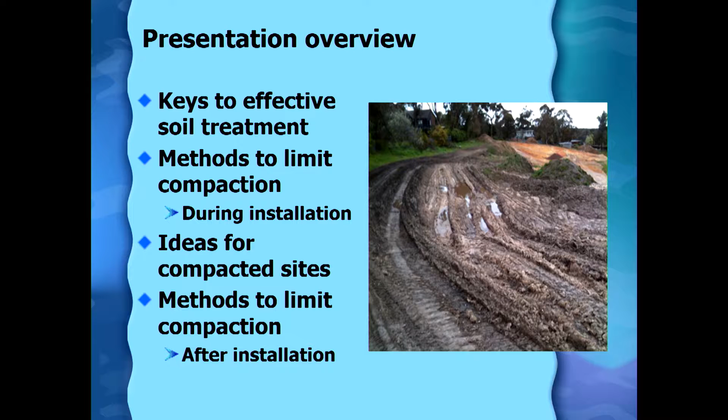We'll then talk about methods to limit compaction during the installation process, ideas for sites that are already compacted. What if the only place you have to go got compacted? Hopefully not by you, but what about the builder, the homeowner—maybe it used to be a feedlot, whatever the issue might be. And finally, education for the homeowner, because you may leave their soil dispersal system there working well, and then they compact it through what they view to be regular activities.

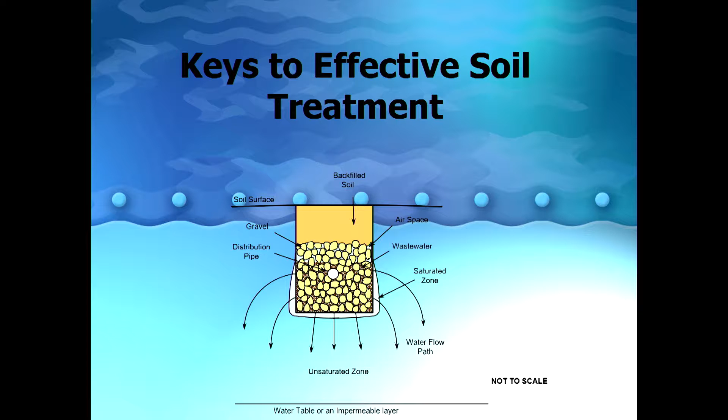So again, first looking at that key: we've all seen a diagram like this, and exactly what's in your trench doesn't matter because where all the magic happens of treatment and dispersal is the soil around it. So the key thing is when we say unsaturated soil, those pores are open, so we get air—the oxygen around us—to passively diffuse into the soil. So if that soil has been smeared or compacted, treatment is going to be challenging, and dispersal of that water moving away from the system is going to be challenging.

So I mentioned unsaturated soil—it also should be natural. And it's really hard to find sometimes on some sites, natural soil. But the key thing I'm going to focus on is what we do that makes the soil not natural. So it is true that, you know, if it was ever farmed, was it compacted?

We also know that if you look at any given field, the row ends where they turned around are much different than the rest of the field. So identifying areas where we have the least amount of compaction, and then looking at shallow dispersal.

This is another key to effective treatment, because the fact of the matter is, generally speaking, the best soil we have is near the surface for several reasons. One, it's where all the microbes are. They want food and oxygen, and generally, the closer you are to the surface, the more food and oxygen there is. It's where we have root activity, and this all gets back to oxygen transfer.

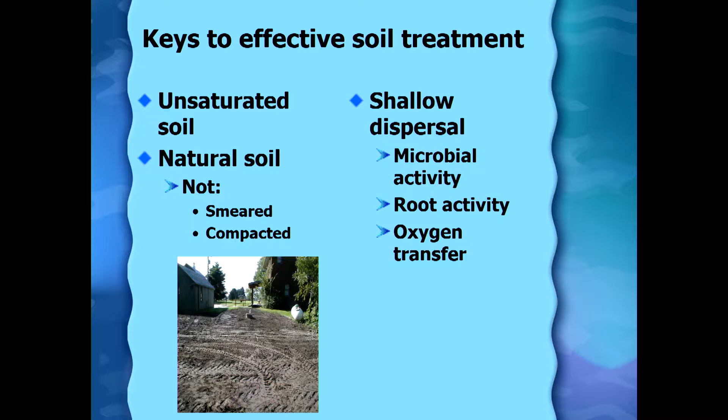The air that we're breathing around us is 21% oxygen. So we are relying upon natural diffusion for that oxygen to get to our dispersal system. So if it's 2, 3, 4 feet in the ground, there's going to be less oxygen reaching that infiltrative surface.

So when we look at the first issue of unsaturated soils, the pores in about half of the soil—you take any given soil, about half of the actual makeup of the soil is pores. The other half is the minerals. So when we have pores that aren't saturated, then there's going to be air with oxygen present.

When we have this, then when the wastewater flows through the soil, it's going to come in contact with the soil particles. And there are some of our removal mechanisms that rely upon that, particularly when you look at phosphorus removal. Phosphorus is either adsorbed or precipitated onto other minerals in the soil. So it needs time and contact for that to happen.

Also, many of our bacteria and viruses are actually attracted to the soil particles. You'll see in these conditions it's aerobic, which is critical for removal of bacteria and viruses. When you think about the bacteria and viruses that you may have when you're sick, they live in your gut, in your intestine system, which is actually an anaerobic environment.

And if it goes through just a conventional system and goes into a septic tank, it's the same thing—actually the bacteria and viruses are not killed off in the septic tank. But the difference is when they make it to an aerobic area, so that could be in an ATU, a media filter, or our soil dispersal system, those bacteria and viruses cannot live in that environment and they're killed off. So we are always striving for unsaturated flow in soil treatment systems and in media filters.

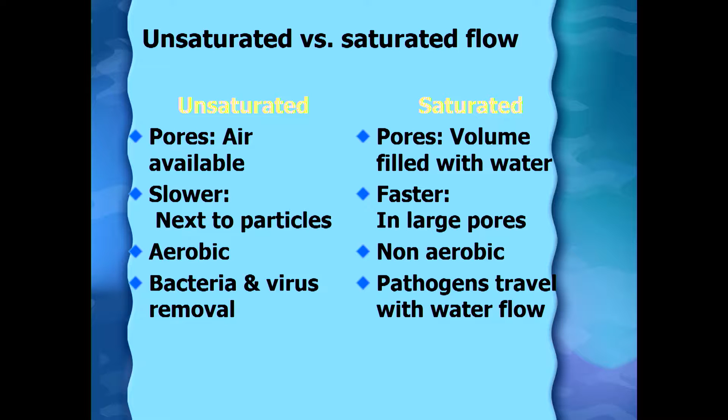So then moving over to saturated, it's the exact opposite. Here again, our pore space is going to be filled with water. The flow of wastewater, if it is moving through that soil, is going to be relatively quick and through the large pores, so we're not going to get good contact. It's not aerobic, and we certainly have the risk that pathogens are not going to be removed in those conditions.

So the key to this, again, is to maintain our natural soil conditions. Our soil at or near the surface is generally our best soil for treatment, for removal of organic material, bacteria, and viruses, and dispersal. So there's a lot of water going through our typical septic systems.

Based on the general data we have, the average person uses 50 to 60 gallons of water a day. And if you take 3 or 4 people living in a house, that equates to about 75,000 gallons of water. Now think about the average area of a septic system. That's a lot of water. So we're asking the soil to do a pretty amazing job.

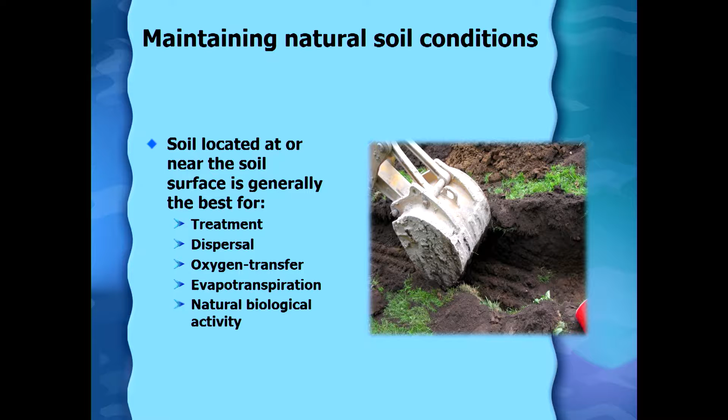You guys might get a lot more evapotranspiration than we get in Minnesota, because today in Minnesota we have zero, right, when the ground is frozen and covered with snow. But we still are relying upon that soil to take a lot of that water, which means dispersing it below the ground. So that soil near the surface has good oxygen transfer, good evapotranspiration, and again, it's where all those microbes are.

So we can damage this natural soil. So we'll talk about the difference between smearing and compaction. So smearing, and I'm sure you've all seen these buckets, right?

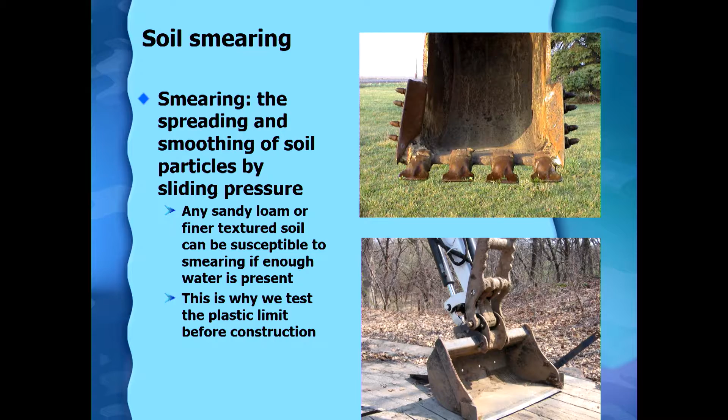You know, I think about, oh, okay, you can smear a clay, right? Well, you can smear anything that has enough clay in it. So a sandy loam or finer textured soil can be smeared if there's enough water present. So that's really the two factors we need: enough silt and clay along with some moisture, and if I have those conditions, I can see smearing. This is why if you're working in wet soil conditions, it's important to check that plastic limit to make sure you're not above that.

So a little bit about smearing. The nice thing about smearing is that it can be raked out. Where you often see this is when you're digging a tank hole, right? You see that side that's all shiny. No problem, right? But when you start talking about the sidewalls of a trench or a bed where you're going to rely upon the natural soil, or when you're scarifying a surface, you could be smearing it, and that's when we actually need to be raking that smearing out. If not, the soil infiltration rate will be reduced. How much it will be reduced depends on how smeared up it was.

So this isn't, if you have a site and you may be out troubleshooting, you maybe didn't even install it, and you were worried it was wet when it was built, it may not fail at month 1 or year 1, but it's more of a long-term problem. 5, 10 years down the road, if they cut the infiltrative capacity by half, or the oxygen transfer, because really what you're looking at is when you see that smear, those pores just got closed off. So there's no way for oxygen to get in, and there's no way for water to move through that.

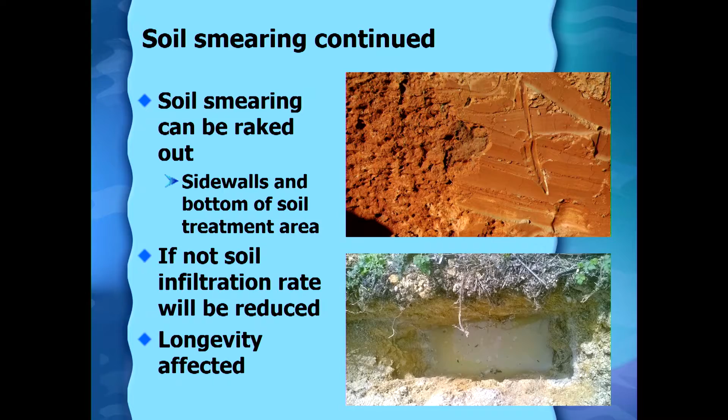So moving on to compaction. Compaction is actually 3 different things. The first thing is it's the compression and the loss of volume. So you can all think about, right, taking a clump of natural soil, squeeze it in your hand, right, it gets smaller. But it's more than that. It's more than just compacting the volume.

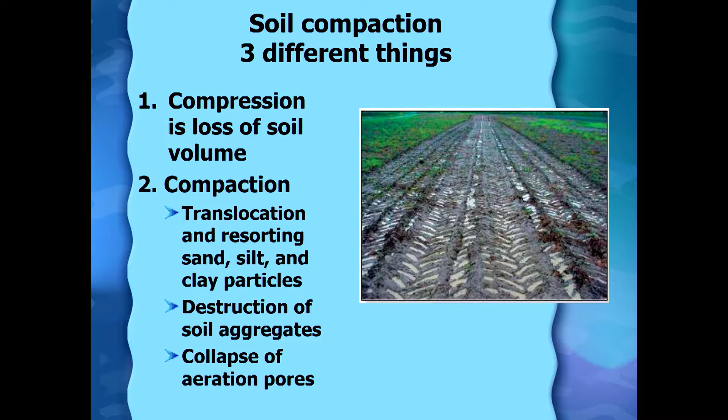It's also this process of compaction, which is the translocation and resorting of the sand, silt, and clay particles. So now they're not going to be in their natural soil structure. What we see then is the collapse of their aeration pores in the given soil. And the final thing is that actually the soil gets more tightly bonded together when it's compacted. And you can think about this, right? If you're building a driveway, this is exactly what you want, right? You want that to be compacted because then you know you won't have any settling.

So when you do this, the water is actually squeezed from the soil, and this process leads to increased internal bonding. So now the soil is going to be super stuck together, which is going to be really hard for water to move through.

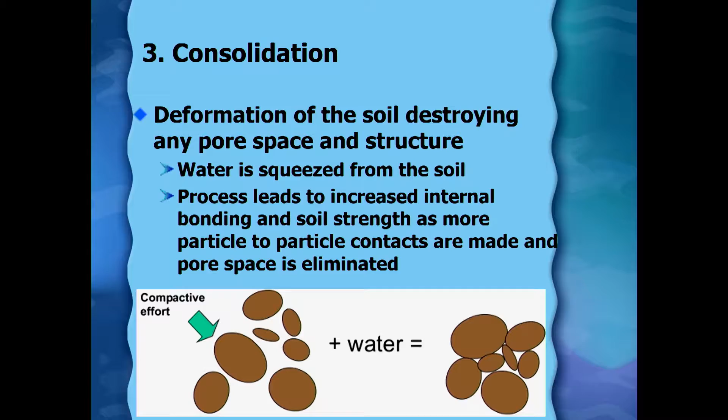So our goal with all of this is maintaining that pore space. I mentioned this before, right? About half of a given soil is going to be sand, silt, and clay, and the other half is going to be the pore space. So when we compact it, you can see there's still some moisture, right? But what happens when I compact it? I see now a lot less white space. The white space is the location for air and for oxygen to be getting into our system and diffusing down.

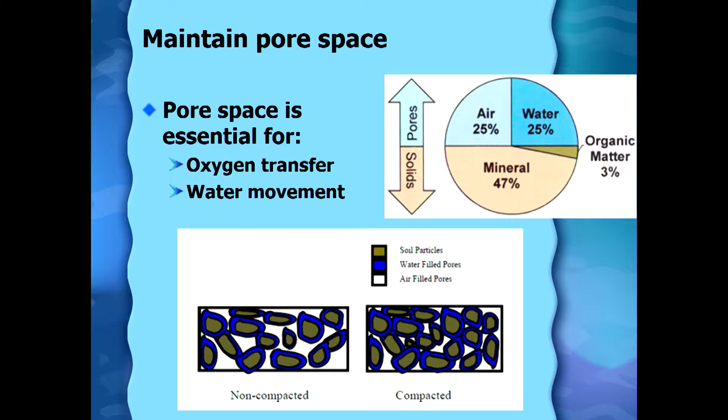So I wanted to talk about shallow too, as far as one of the last issues for good treatment. When we have shallow dispersal, this would be with our drain fields, it'd also be with drip, right? When you're using drip irrigation, you're putting it into the upper soil. Last year I spoke in New Hampshire, and they told me on their sites they take off all the topsoil. And I said if we did that with some of our sites, we wouldn't be left with anything good, right? That's the only real good dry soil we have on some of our sites. So if you're taking it off a site, you're certainly risking damaging that through those practices.

There's also more and more research showing that this topsoil can assist with nitrogen removal and also removal of new contaminants of emerging concern.

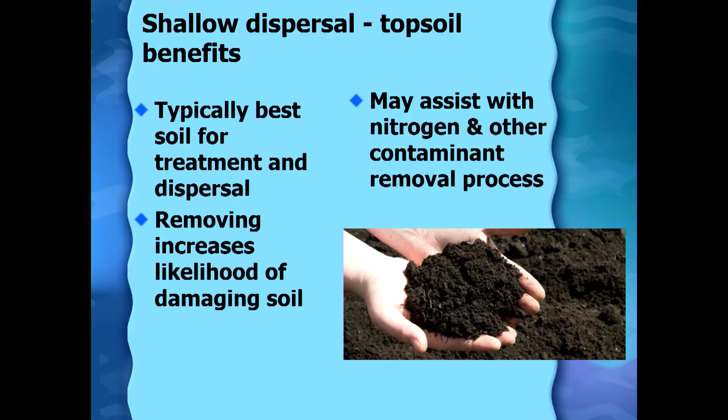When we look at things like ibuprofen and pharmaceuticals, we're actually finding that the soil microbes are assisting us in removing many of those contaminants.

Here's one of the key reasons why shallow is beneficial. Generally across soils, in the upper 16 inches, you have almost 99% of the natural microbes that would live in that soil. So what happens if you put the bottom of your system at 30 inches? Sure, some of those microbes will go down there since you're putting food and nutrients, but the reason they're naturally up there is because that's usually where you have topsoil that's black. That black is food, and there's also more oxygen present. So if we're putting it there, bacteria and fungi, which are also part of our treatment process, are going to be more naturally present.

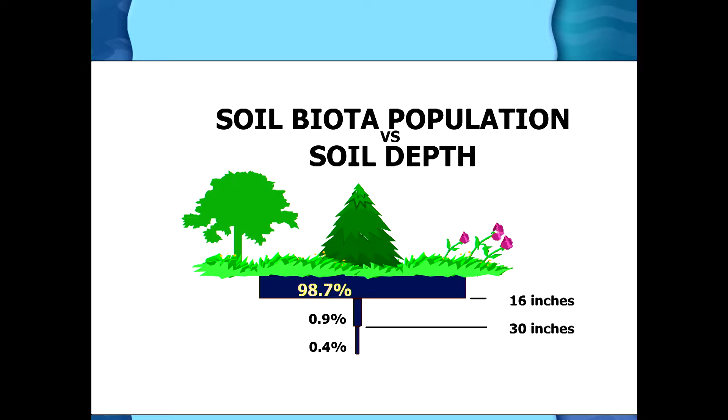Related to this is where we'll see our root activity. Again, this is general, not any specific site, but once you're at 24 inches, you'll see two-thirds of the root activity is generally in the upper couple feet. So using those upper 24 inches is where we'll see the best treatment in most of our soils. That assumes it hasn't been compacted or smeared, which is sometimes the risk with shallower systems in our soils.

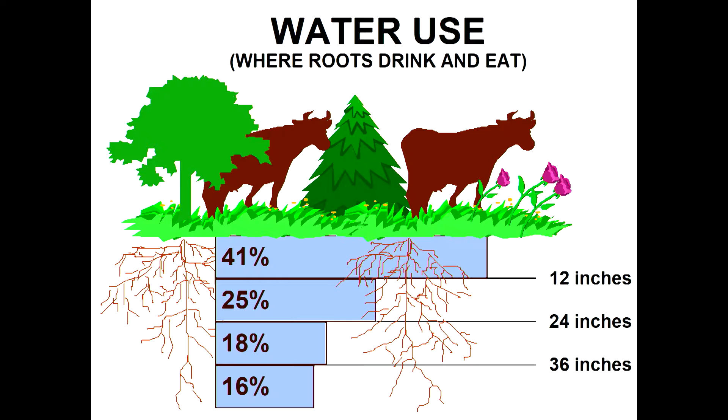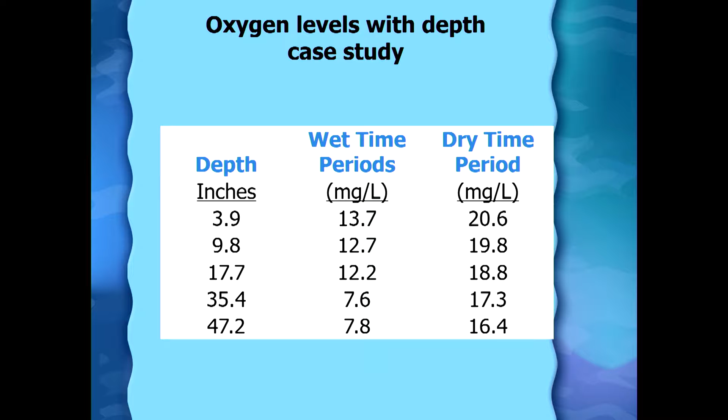So during our wetter times of the year, there is less oxygen available, but the good thing is our soils dry out - unless you're from maybe Seattle where it rains all the time. Our soils actually go through wetter periods and drier periods, but even when it's wet, the soil still has oxygen in it if we're designing based on redox features and models in the soil.

So I mentioned the nitrogen removal, and if you're not into chemistry, you can take a little nap here. The good thing is you all just had sugar, so I'm better than right after lunch.

What happens is when we see a typical form of nitrogen, it's ammonia - that's commonly what's leaving a septic tank. If you expose that to oxygen, that ammonia very quickly converts into nitrate. Nitrate is a problem - there's a federal drinking water standard for nitrate of 10 milligrams per liter. So we want to make sure, before anyone would use that water for drinking in particular, that we have reduced that. Most of the time how we look to reduce that is through some sort of denitrification system.

You can actually do that if you have the right natural conditions as well. To denitrify, microbes that are anaerobic come along to this nitrate and they strip the oxygen off, and the nitrate goes to nitrogen gas. For that to happen, you would have to have a location in your soil where things become saturated and where you have carbon. So sometimes if you have an aerated effluent - that could be coming from an ATU, or after going through a mound system - if it then hits a topsoil layer that has that organic material, you can see nitrogen removal.

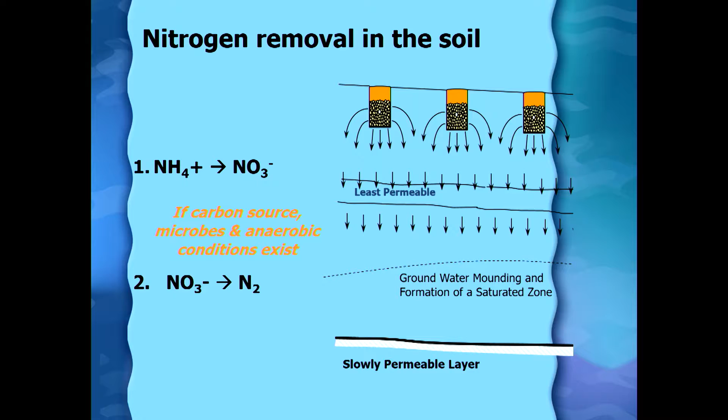So there are actually companies now looking at whether we can mimic that in situ, in the soil. There are systems where they're looking to add carbon - add wood chips - if your goal is nitrogen removal.

So now the real topic at hand, the title, was compaction is the enemy of our soil treatment area. It has others, but it's the one we're looking at today. So we're going to discuss what happened before you were there.

If you're a designer, Google Earth is amazing, right? You can look at what happened 20 years ago on a site to know, was it a feedlot? Did they used to park all the trucks there? And that's not just 20 years, you can look at a lot of historic information. Sometimes the homeowners will tell you that as well, and certainly then we want to look at those sites closer.

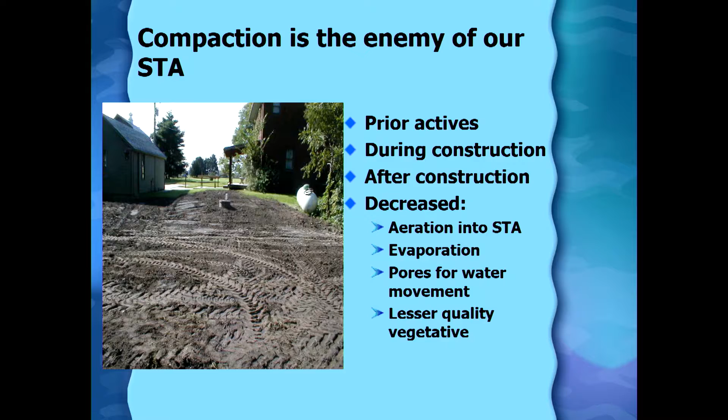Then we'll talk about during construction, after construction, and all the while our concern again is aeration, evapotranspiration, pores, and the last thing, which I haven't touched on yet, is growing vegetation. We've all seen sites that are compacted, they can't get anything to grow. Well, if you can't get anything to grow, you're also not getting oxygen transfer into your system.

So again, some techniques. This is not a good one, right, to maintain natural conditions. We should never be driving our equipment directly over our infiltrative surface. That to me is the area where sewage is going to be meeting the soil. So once you open up the bottom of a system, we do not want to in any way drive on that. And the next one, you'll say, and I've had people roll their eyes at me, limit your foot traffic.

Which sounds pretty extreme, right? So if you walk across the bottom of a trench, is it going to fail? Not very likely that it's going to fail immediately. But I will tell you that we often, as humans, have a higher pounds per square inch than the equipment you're operating on your sites. We have pretty small feet for what we weigh, and I'll show you a chart coming up that really shows that. So limiting foot traffic and/or raking out footprints that are right across the bottom of your system, I actually think has some merit.

So we talked about raking the sidewalls, thinking about the pounds per square inch of your site, so using low ground pressure equipment, and also where is your equipment situated.

So if you have a site that has some slope, this doesn't really work on a flat site because you got to work on it from some side. But if you have a site that has some slope, working from the upslope side of the system is always to your advantage. Because when we start putting all that water into the soil, some of the water moves down, and if it hits any sort of restriction, some of it's going to move laterally for dispersal. And if it's got a slope, it's going to move downhill. So we know that downslope of that system, we are going to see an increase of water movement. So we also don't want to compact down gradient from our system whenever possible.

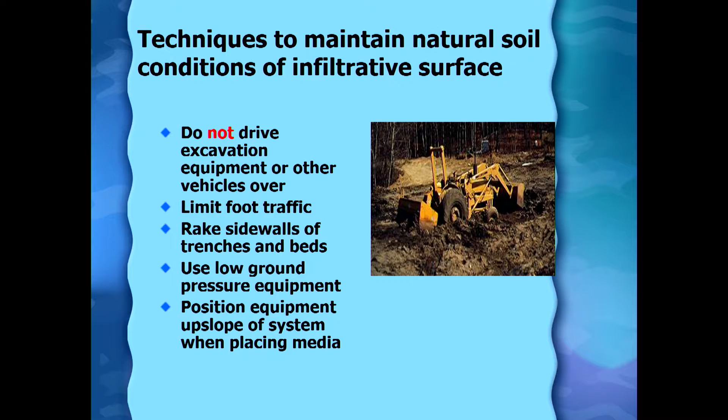So some methods to limit compaction during installation. Having it be at the right moisture conditions. This is primarily too wet, although you can also smear a soil up when it's too dry. Reducing your tire pressure to the minimal allowable pressure. So if you do this, what happens is your tires then have a bigger footprint to spread out the weight of the equipment. Probably more likely is that you're actually using tracked equipment on sites where you're concerned about compaction. So again, what a track is going to do is take the weight of your equipment and spread it out over a much larger footprint.

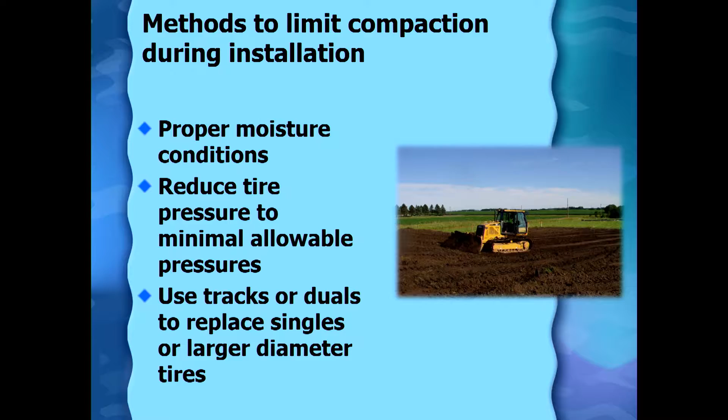There's research showing that if that site is allowed to have rainfall across the top of it, it will develop a crust. The crust is usually only about half an inch thick, but that crust will limit water movement. So if you do have a site where that happens, that's a site where you would want to go back in and scarify that site. But I would also say you just don't want to scarify or open up that site until you have whatever media you're going to put on top of that to cover the system.

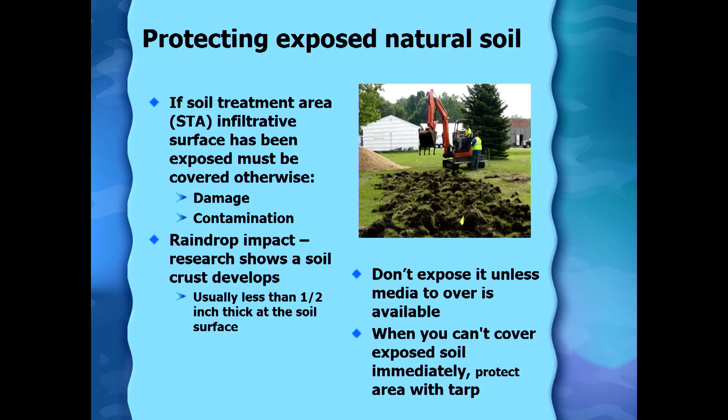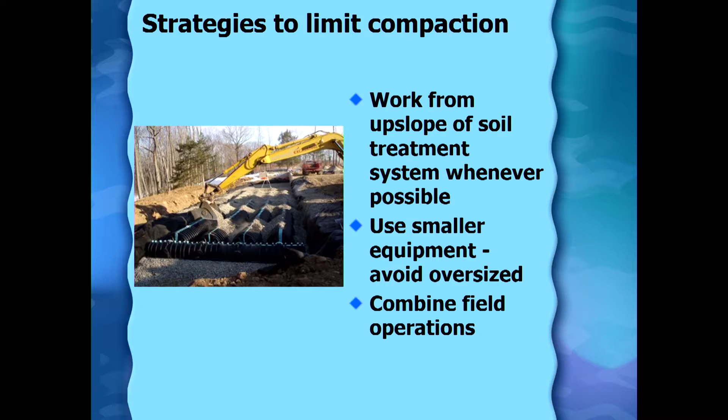So some other strategies, here's a picture where again, the excavator is working from the upslope side. There's actually some slope across this site. Again, using smaller equipment, avoiding oversized equipment. And the last one I'm going to show you some really interesting research on, and that's combining field operations. What I mean by that is you're going to have equipment on your site, you're going to have to compact soil. So if you're going to do that, let's have a pathway where we dedicate it to compaction.

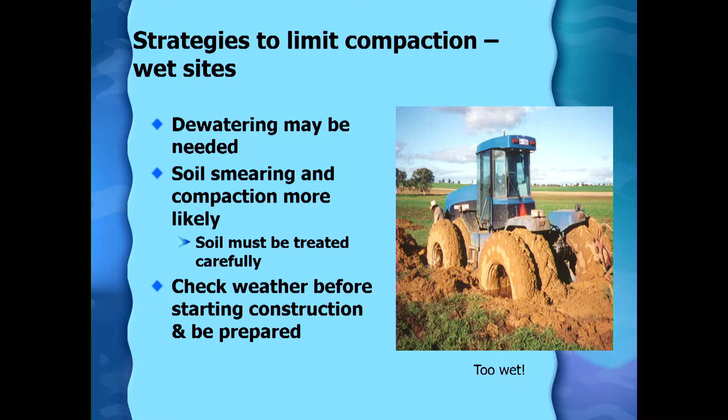So a few things here, again, strategies on wet sites. There are some sites where you may need to dewater. Commonly I see this for tank holes. If you have water leaking into your tank hole as you're digging it, that's not going to create a stable excavation. These sites, smearing and compaction are going to be more likely because we have moisture present in the soil. So you always want to be checking the weather before construction and not be opening a system up when you expect rain to be coming.

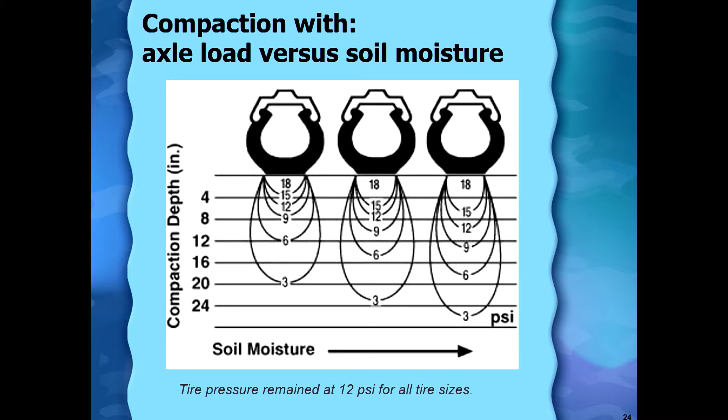So this shows the difference. This is looking at research that's evaluating as you have more moisture present in the soil, how deep your compaction goes. With this example, the weight was the same. The only thing that changed was how wet the soil was. So you can see as we get wetter and wetter, the depth here was 24 inches, and this was 12 pounds per square inch for all tires in this study.

The next one looks at a little different - it looks at increasing the axle load. This is the actual weight that was placed on the soil. So the double whammy would be a really big piece of equipment, right - really heavy pounds per square inch combined with wet. We then will get the deepest compaction. And that is the hard thing about compaction, is it's not all the same.

I remember once I was flying out west in a plane, somewhere above 10,000 feet, and the pilot said, if you look out the right side of the plane, you'll see the Oregon Trail. You can actually see a line traveling across because of how compacted that is. That's about as bad as it gets.

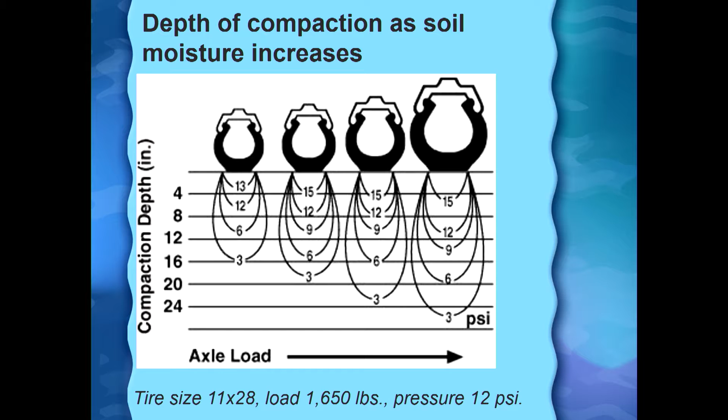So then you look at, well, we've had an area that's been farmed historically - has that been compacted? Well, it actually depends on their farming practices, right? It depends where they turned around or where their road was out to the field. So compaction isn't the same everywhere.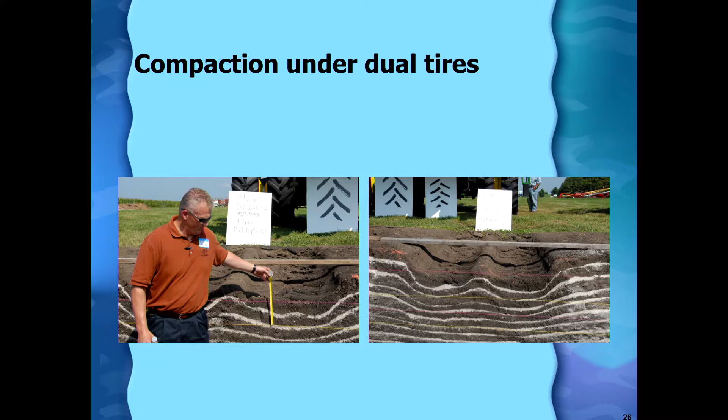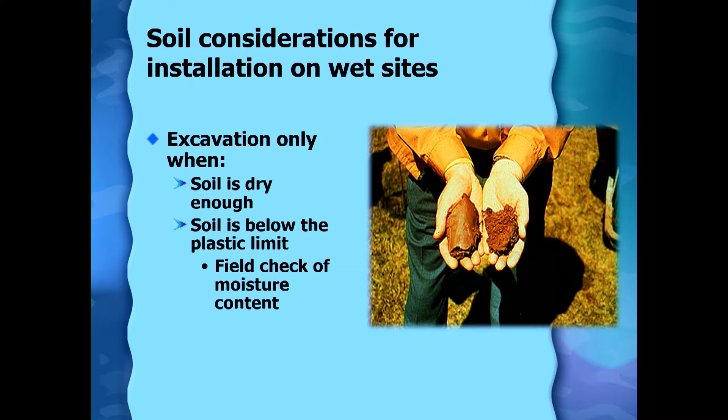So when we're going to look at building on sites, we're going to excavate only when the soil is dry enough. Here again is the same soil, one that's smeared and one that's not. I did mention the soil can also be too dry. I don't have this issue, but I can envision there could be parts of Texas where you can have really dry time periods. During those times, it can also be smeared by a bucket. What happens during these time periods is fine soil particles are separated and stratify into layers. This stratification then impairs the movement of water.

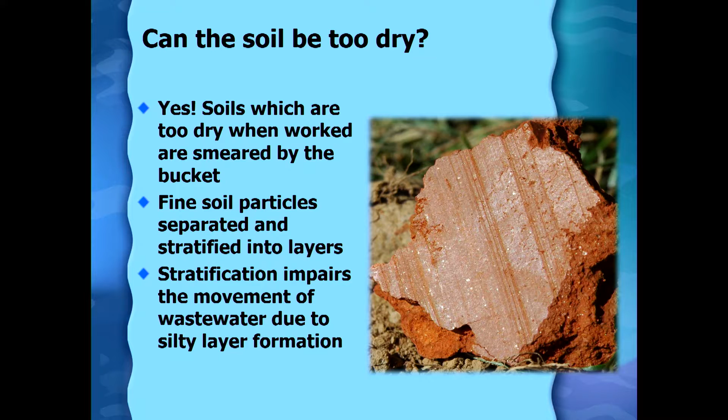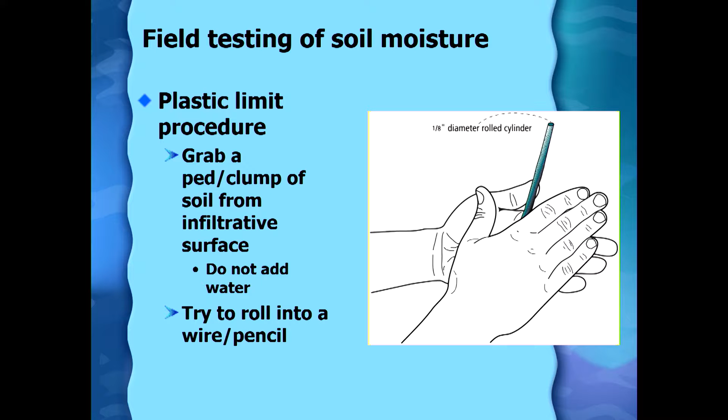Looking at the wet side of things, the way we check if the soil is too wet generally is with a plastic limit test. You grab a clump of that soil - the wettest soil you expect to accept water. That might be right at the surface, it might be 6 inches, it might be 8 inches. So we're going to grab a clump of that and try to roll it into a pencil. If I can get it to be a diameter of a pencil and a couple inches long, that's above the plastic limit, and smearing and compaction are going to be much more likely. That's really where we need to wait for the site to dry out.

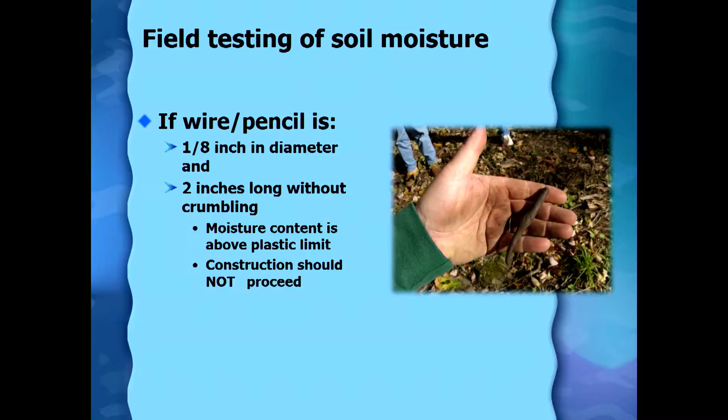Another thing to consider during construction is marking off your system. You usually know where your drain field is, so you're not going to drive on it, but what about the people delivering materials? If they're doing any other construction on the site, you really want to protect that system during the construction process.

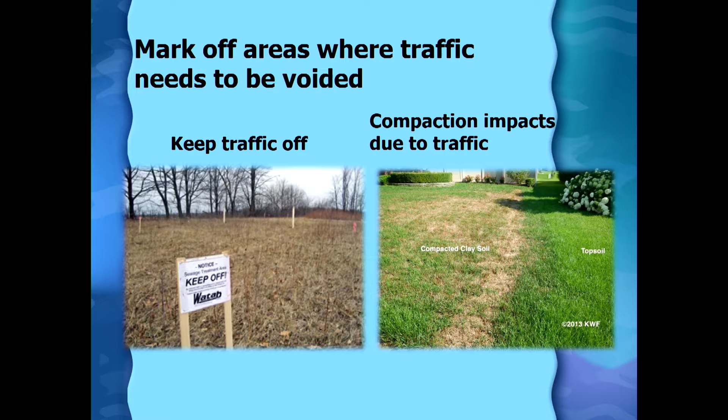This picture shows a drain field that's already in place. This one was at a community where they wanted to make sure nobody parked on it. Here's the other side of it. When you have a site that's been compacted, it's very easy to see: here I have nice uncompacted topsoil, and here they can't grow anything. The sites are side by side.

Related to this is the reserve area. If you have new construction, or even an existing replacement system, where's their next system? If they do have a reserve area, it's something the homeowner should know about and should be written on your design plans, but also considered for protection. This was again a community site. You can see these houses back there, they're not tiny. You can just envision when they have company, or a graduation, that would be an awesome spot to park all the cars. So often people see open space, often where our septic system dispersal area is, as available space, when in fact it's not.

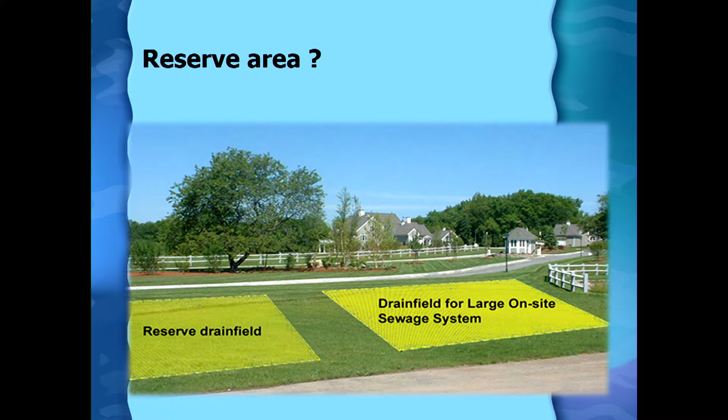So if you're working on a site and there needs to be vegetation removal, the first question is, who's going to remove it? I sometimes hear homeowners say, oh, we'll take care of that ourselves, because they're trying to save money. So what kind of equipment are they going to bring in to remove the vegetation? Or are they going to hire someone who's going to come in with a giant piece of equipment and start ripping out trees?

So in general, when it comes to trees, we recommend, unless they have to be removed, that you just cut them flush and leave them in place. The process of taking those trees out, you're going to need to rip up the soil basically to do that.

So the next one is, if you have a homeowner who wants to save a tree—and don't get me wrong, I love trees—but most of the trees that live where you're building your septic system want two things. One, they don't want their roots compacted, so if you're driving around the tree, the tree's not going to like that. The second thing a typical tree wants that lives here in Texas is the normal amount of rainfall you get, right? I'm sure it varies quite a bit.

I just looked up right around here, and you guys get around 40 inches of rain a year, so the trees that grow here are used to about 40 inches of rain. If you put a septic system right next to their tree—even 10, 20 feet away—there's going to be a lot more water than was ever there before. And unless it's a willow, which I don't want either for other reasons, that tree may not like all that moisture. I've seen installers go to great lengths to save a tree, and 5 years later, for those two reasons I just mentioned, the tree's dead. It would have been way easier to install the system from the beginning.

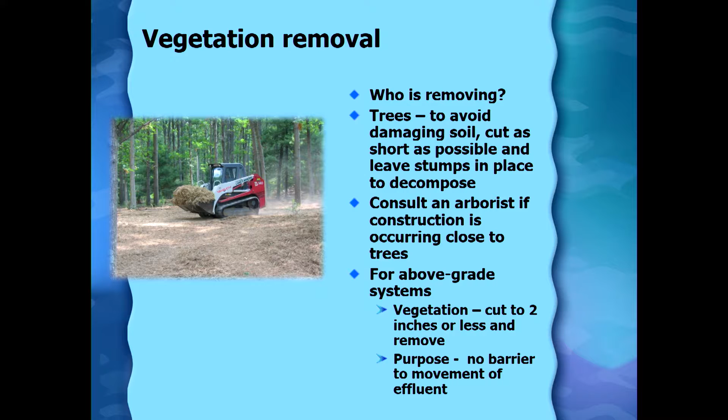So again, I'm not saying it's not worth trying to save a tree, but that's where I recommend they bring in an arborist, because then when the tree dies, they're not mad at you—they're mad at someone who's a tree professional. So those are things to consider. The other thing, if you're building anything above the ground—an at-grade system, a mound system—those sites you just want to make sure excess vegetation is removed, because you don't want a barrier to water movement.

So the next discussion is about roughing. This would be with trenches, with beds, with at-grades, with mounds—not really with drip, because that's not typically the process. Your goal here is to open up the natural soil structure, so that when you start putting water in there, there's no barrier between your media and the soil. Once we open that up, we're never going to drive on our loosened soil. We want to make sure that during this process we don't smear or compact.

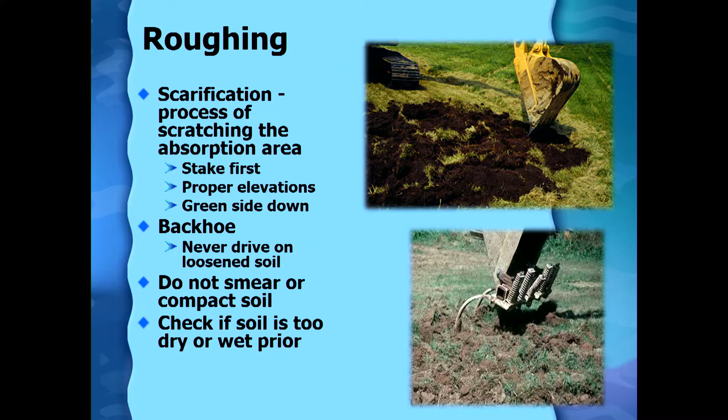I showed that picture earlier, and here's what I mentioned before about compaction when you're building systems. A typical person exerts somewhere around 10 pounds per square inch, depending on how much you weigh. Now look at a typical bulldozer—same thing. Now we go to tractors, which can get bigger, and tractors don't get smaller these days—they just get bigger. A rubber tire scraper, a sheep foot roller that's designed for compaction, or a person in high heels.

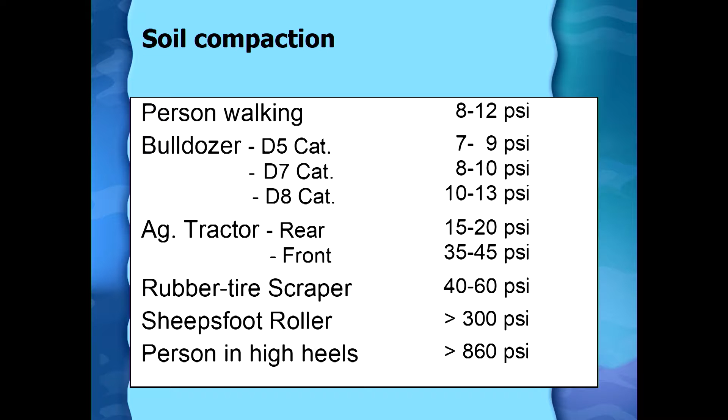So it's definitely not recommended to install systems wearing high heels, right? Definitely not. You'd be like, why is that even on the chart? It's not a joke. So you know who cares about this number? People who install flooring. You're wearing a nice high heel, it has a big pounds per square inch that can damage flooring. But this really gets at the idea that if you're worried about driving a bulldozer across your system, that whole activity of walking across the bottom is a comparable pounds per square inch.

So here's a compaction study that was done. This study was done because the general theory is, and I've heard people say this, 'well, I only drove across the site once.' Well, that first pass is where most of the damage happened. So they took a site, measured the density of the soil, then ran a piece of equipment over it 10 times, and between each pass measured how the density changed.

You'll see that in the first pass, this was native soils with an intact topsoil. With the first pass over that site, 70% of the reduction, the compaction, happened in the first pass. In the second pass it was another 10%, and in the third, 5%. So now you're at 85% in 3 of 10 passes. But I don't really care about the second and third - it's the fact that 70% of the compaction happened the first time.

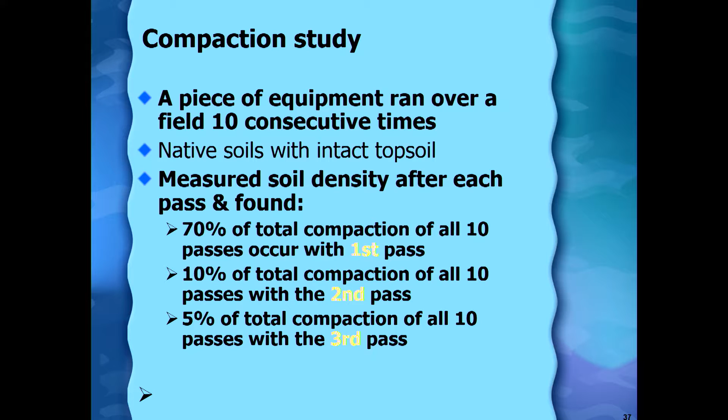So your tank gets delivered, let's say it's a concrete tank, so it's heavy, right? It comes in and backs up over your drain field. You did most of the compaction that would happen, no matter how many times he drove onto that site. You may say, well, that's just one study - but there are other studies that support it, showing as high as 90%, and it'll be worse if you've removed the topsoil or if it's been filled. You may see this even more accelerated.

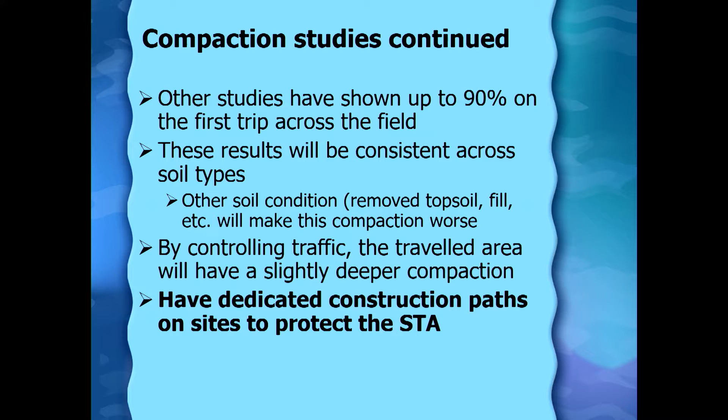So the point of all this is that you should control traffic on your site. Anytime you're doing new home construction, this is huge, because of the amount of people coming and going off those sites. I've seen sites where the septic area ended up being like the parking lot in the middle because there was nothing else there, it was open space. While your system is being installed and materials are being delivered - and this is everything from building a home to even on an existing site, your activities - having a dedicated construction path that everybody uses is important, because we're going to compact it. There's no way to not have anybody deliver anything, so let's know where we're compacting.

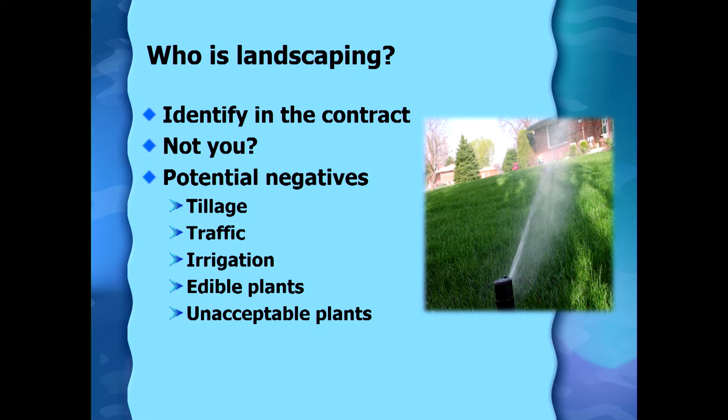So moving on, who's landscaping? This should be identified in the contract if you're the installer. I've seen homeowners think that when you leave, it'll look like when you came, which is not what's going to happen. Are they going to get it back to the way it looked, or are they expecting you to do that, which is almost impossible? That's a good thing to clarify up front. And then the other question is, if it's not going to be you, do they understand the risks that come with landscaping? Our concerns would be tillage, traffic, irrigation, edible plants, planting trees or brush right across the top, bushes right across the top of your system. Those are all concerns if you're not part of the landscaping discussion.

So the one I really wanted to hit is irrigation. Having irrigation systems over our septic systems is, to me, kind of like beating your head against the wall - it's completely unproductive because we're asking our septic systems to do a lot for us. When a system is first built, if they need to do a little light watering to get grass growing, that's one thing. But the issue is, in an average year, depending where in Texas you are, you're somewhere around 40 inches of rain. And even when it rains, not all of our rainfall has to go into the soil - some of it can run off.

A typical household with 3 to 4 people is going to put out 75,000 gallons of water. If you take that 75,000 gallons and split it over the area of your drain field, in a sandy soil - because we can put a lot more water into sandy soil - that equates to 59 feet of water.

If you're looking at a clay loam soil, we make those bigger, it's 22 feet of water. So the last thing we need is extra water. That's also why when we build systems, we always crown them, so when it does rain, that water runs off. Because the soil is amazing, it cleans up dirty water and accepts it all, but let's not ask it to do more for us.

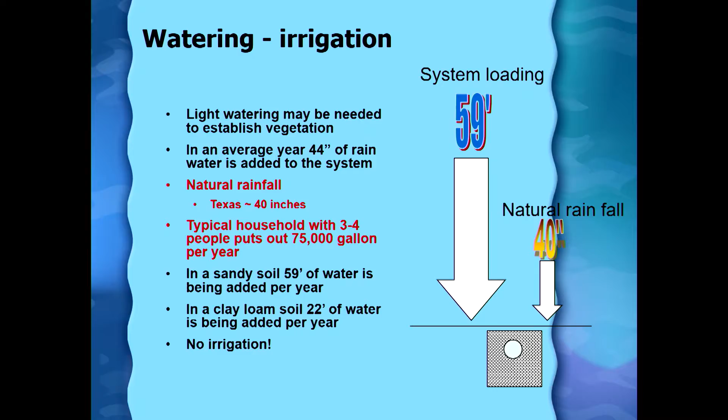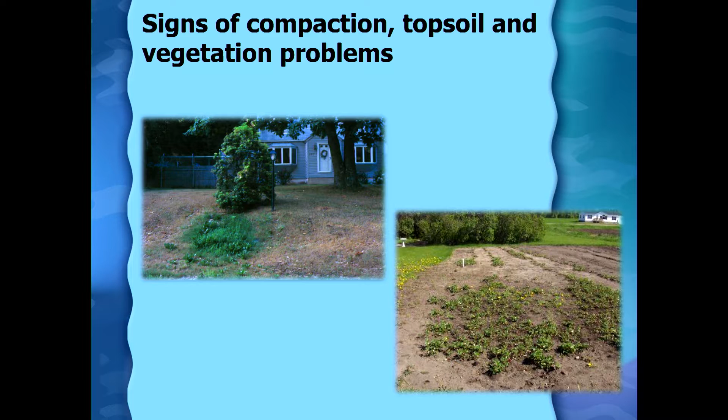So again, just some pictures showing signs of compaction, topsoil, vegetation problems. Your vegetation can tell you a lot if you're out there later doing service providing about what happened to that site, either during installation or after.

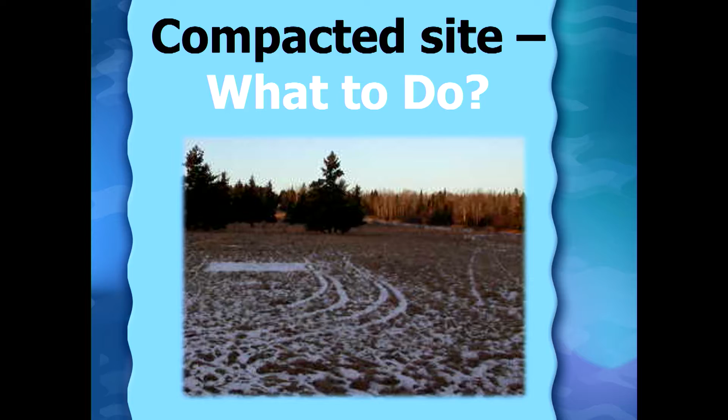So moving on to what do you do if you have a compacted site? And it's not always this obvious. Here's a site, and you probably don't see this often because there's snow in it as well, but it's really rutted up. I can see that there's been equipment that's driven across the site. Sometimes it's deeper, though. So whenever possible, we want to avoid compaction. That's certainly best, but if it's something that happened after the design process, then you want to go back to either the designer or the county to talk about what are our options for this site.

The next question is, how bad is it? There's times when you're augering and you can feel compaction. When it's really bad, you can feel it with your bucket. But ultimately, having a soil pit to look at the soil and/or running some hydraulic tests - that could be a perk test, a saturated hydraulic conductivity test, an Amoozemeter, some device that actually measures how water is moving through that soil. If you have that information, you can then compare it to how that soil should perform.

Another thing that often comes up is, well, I'll just give it some time and the compaction will open up. So things that do help with compaction are freeze and thaw cycles, root activity, natural weathering. But those happen at the very top first, and are never going to deal with deep compaction. Ultimately, once you've compacted a site, it's never going to be natural again. We may be able to get some of its properties back. People have experimented with adding organic material to help. There are different techniques, but it's very difficult.

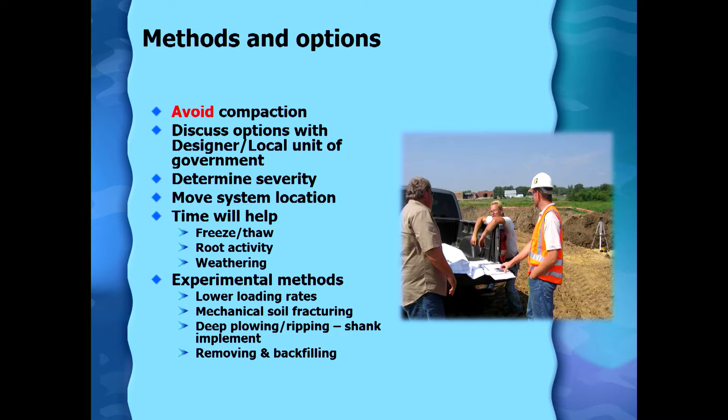So overcoming compaction. I mentioned you will never get soil back to natural. That's why it's so important that we protect it.

If you're going to try ripping through that, you always want to do it when the soil is dry, and you need to identify the entire zone of restriction. It may be you run into restriction at 12, 18 inches. Well, how deep does that go?

How deep do you need to actually rip through? There's research showing that if you add organic material when you're doing that, it can help restore some of that natural soil structure.

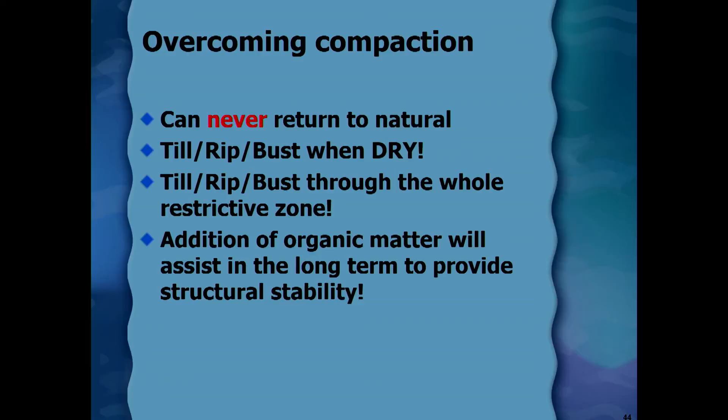So here shows an example, and it may be a little hard to see this from where you are, but what they have here, and this is common in some ag fields, this was the depth of a disc plow. So this went around to 10 inches. So that was fine, right? The corn could grow fine.

But when it got to this zone in between that 10 to 18 inches, the density here was 400 pounds. So it was compacted. And once they got below that again, it opened up. So again, this was the plow pan depth.

So if you put a septic system up here, it might go through this fine, but what would happen when it would hit that restriction, right? It would really slow down.

So in this case, you can see they're running their shank implement, which is what's on the back of this tractor here, through this zone to try to break it up. The downside is it's not perfect, right? Because you're not going to actually get this all loosened up. You're going to get it loosened up kind of where the shank went through.

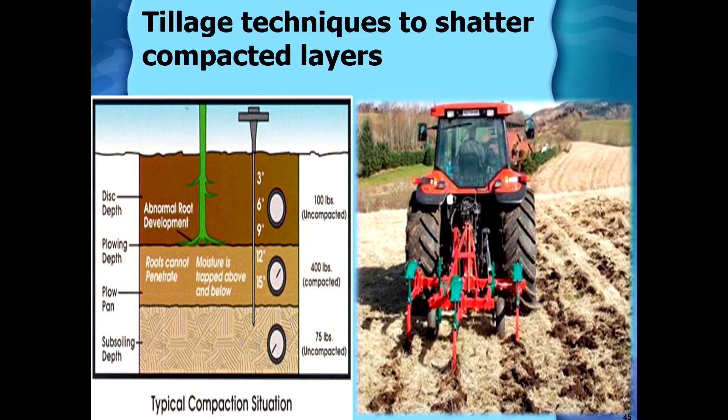So this shows us looking at a real site what the soil might look like. Going back to that one you just saw, there's actually two compacted zones where the water would move through here, hit this, and just stop or severely slow down. So you would again need to go through this whole zone to really break up that soil. And it wouldn't be perfect.

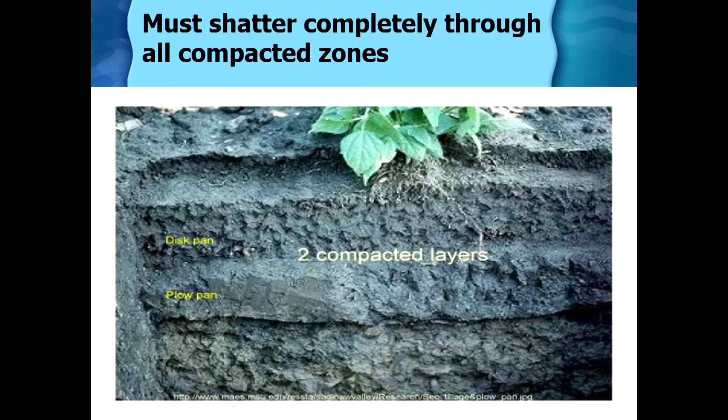So now after installation, right, what can we do? This really gets back to a lot of education. We recommend to all of our installers that it's a really great opportunity to go back after you did the installation. So sometimes you're not even hired by the homeowner, right? You may be hired by a builder, a realtor. So if you go back either in the first few weeks or months, some of the things that can happen during the visit...

The first one would be, well, did anything kind of settle out in that time period, right? Were there any mistakes made? I've seen sites where there was a pump involved and the homeowner was responsible to hire the electrician. So you come back and now there's an extension cord running, right? I don't think that meets your electrical code. It certainly doesn't meet ours.

So making sure the controls and the alarms are set correctly for the use pattern. This really goes back to systems that have time dosing. You have to guess how much water that house is going to use. You don't actually know until it gets up and operating.

Look for any leaks, particularly into our tanks, right? Talk to the owner about the use of their filter or screen if they have one. Are they going to clean it? Are they going to hire you to clean it? Do they know they have one? Let's start there, right? And then understanding that it's something that needs maintenance.

And the one we've talked about is then looking at the final landscaping. So do they have something growing? Did they bring in 2 feet of topsoil, right? Do they have trees planted across the top? Things along those lines.

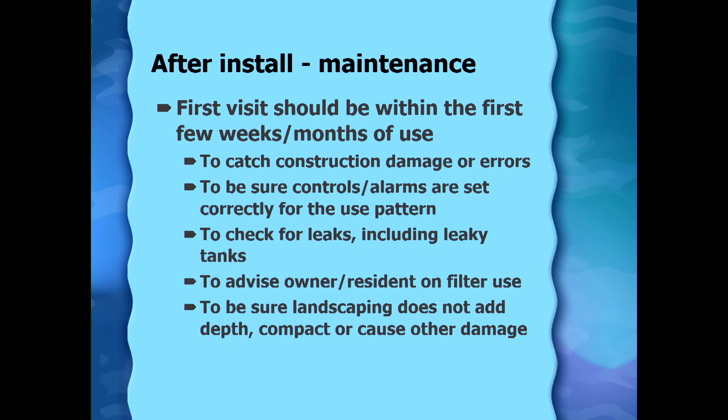So ultimately, we all have our own example of how homeowners can be stupid. So my examples particularly are related to compaction. So when the driveway is crowded, they park their cars over the septic system. I've seen boats, you name it, right? They construct a wooden deck over their septic tank, right?

So you can't even get in to do maintenance. So when homeowners do things like this, they invite soil compaction, broken and damaged drain lines, and then they wonder why they have a problem with their septic system. And it's your fault, right? Even though they did things that influenced their system.

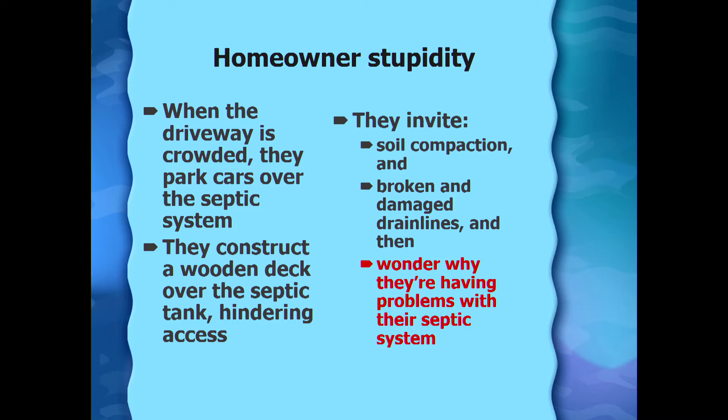So some real do's and don'ts when it comes to landscaping. One is to minimize traffic. The dog can run over the drain field or walk over it, but we don't want regular traffic. Regular traffic usually comes from livestock, since they have paths they prefer to walk on and they will compact the soil, no doubt about it. So we don't want to exercise pets or allow them to play there. Your area for feeding horses should not be out grazing over your drain field. Never drive a car or a vehicle over it.

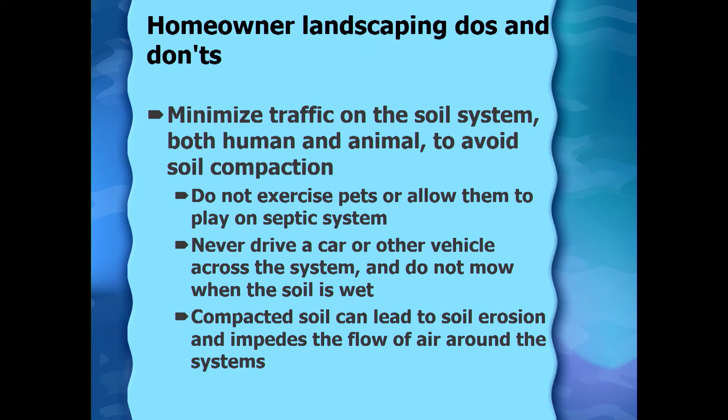Also, don't mow when the soil is wet. I've even seen literature from the landscaping industry that talks about this, even with normal size lawnmowers. If the soil is wet when you're out there, you're causing more compaction. Compacted soil can lead to soil erosion and impede the flow of air around the system.

A horse, for instance, exerts 23 pounds per square inch per hoof, and cattle will be similar. A typical vehicle is going to be around 30 psi. People often ask, when I say the biggest thing that should ever cross your site is a riding lawnmower, how big can the mower be? This was a site that was mowed with a pretty big lawnmower.

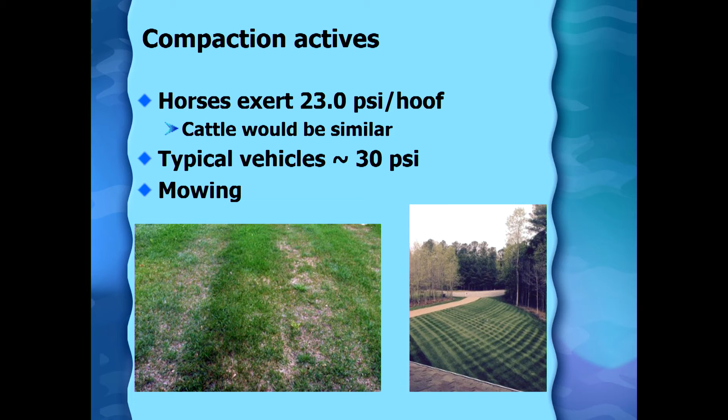You can see the tracks from the lawnmower. Actually, if you have an owner that's meticulous like that, that's better, because they're varying their mow path, so they're not regularly compacting the same area.

So wrapping this up, particularly looking at homeowners, homeowners need education. They don't always want it, and that could be generic information or customized information. Tomorrow morning I'm going to talk about a free tool we have to develop educational materials for homeowners. I know they won't all read it, and I understand education is hard, but you all interact with more homeowners than I ever will, so we still have to take every opportunity to educate them. Most of them don't know how stupid they are -- no, I'm just kidding -- but really, they don't know that they're harming their system.